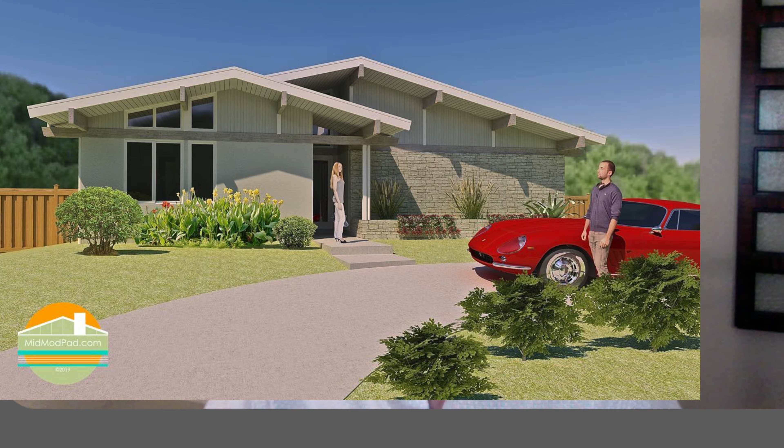To begin, let's take a look at a 1,600 square foot, 3-bedroom, 2.5 bath house that has wall closets off of the bedroom, and there is a walk-in closet off of the master, which we'll talk about a little bit more later. But for right now, the first thing I want to focus on is zooming in on these secondary bedrooms. Each bedroom, in this case, has a closet that is a wall closet.

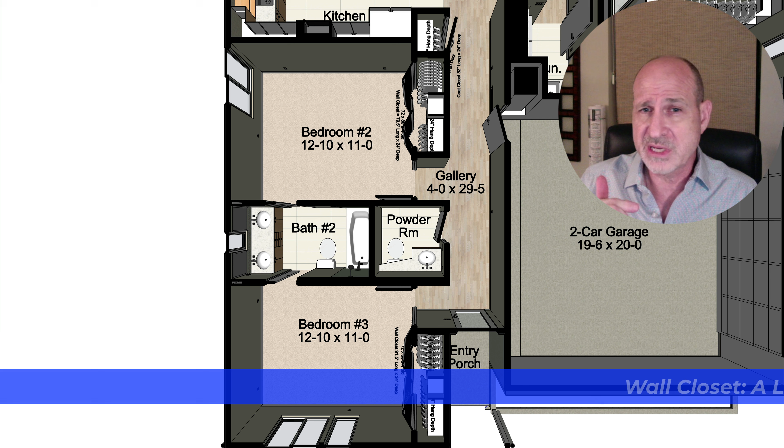Now, a wall closet just means it's a closet that opens up to the room with a wide opening, usually long or long enough to hold at least a child's bedroom clothing, which is a minimum of 5 feet, I would say. And then a lot of times they're anywhere between 6 feet to 8 feet, up to 10 feet long. Not really ever more than 10 feet for a wall closet.

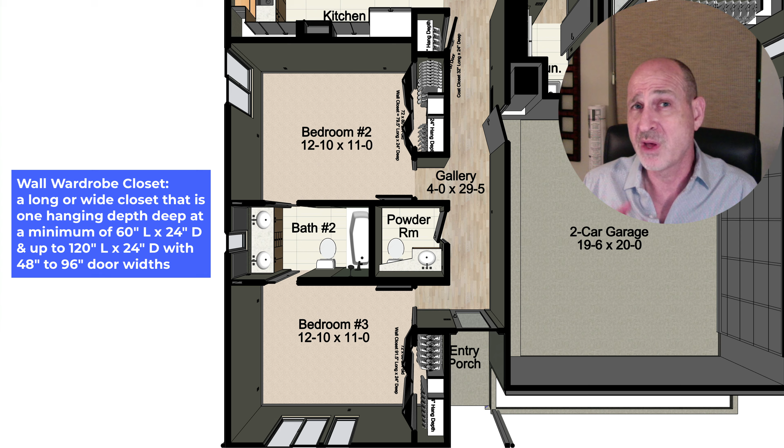But you can see in this case what we have here is on bedroom 2 and bedroom 3, we have a wall closet for each space. So we'll take a look here a little bit closer, and you can see how these are configured. They have a double hanging space in addition to a long hanging space, so you have an option of both in each of these closets.

And in particular on bedroom 3, the closet is a little bit longer. It has a length of 91.5 inches, which is about 7.5 feet, and of course it's 24 inches deep. Now, the 24-inch depth is finish to finish. So if you're doing stud to stud and you have half-inch drywall, then that's 25 inches that you're allowing to frame and then put on the drywall.

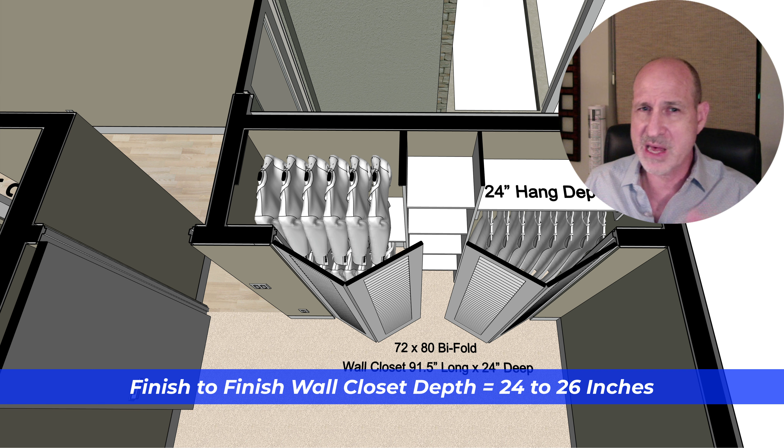Some architects like to give it just a little bit more space, up to 26 inches. That's okay if you have the space to play with, but a lot of times you're limited on your square footage and you want to squeeze everything you can out of maximizing your space in your rooms. So I like to keep them at 24 inches deep for a wall closet.

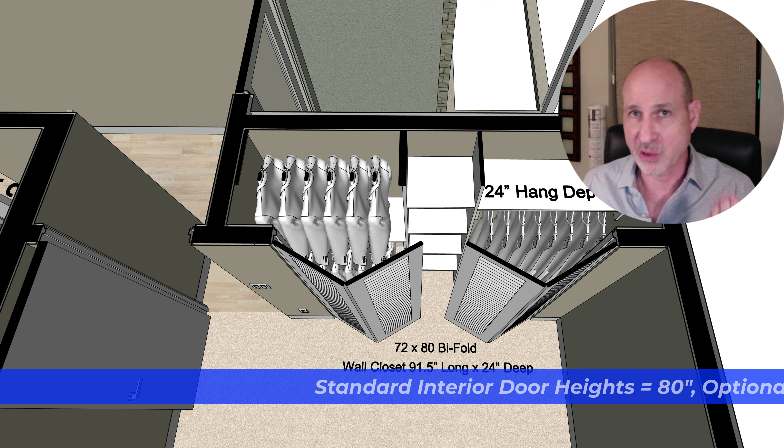Now, you'll notice that we have a bifold door shown here. That bifold door is a total of 72 inches wide by 80 inches tall, which is the standard height for a typical doorway in a U.S. home. That 72 inches has 4 panels of louvered doors. Those can bifold and swing all the way open.

I tend to like to show these more than a sliding closet door, which is an option, or 2 double doors which open out, because when you open the 2 bifolds, you can get a really good view into that closet. And that's really important, I think. If you can see everything very clearly, the natural light from the room goes in, and I just recommend that if you're going to do a wall closet.

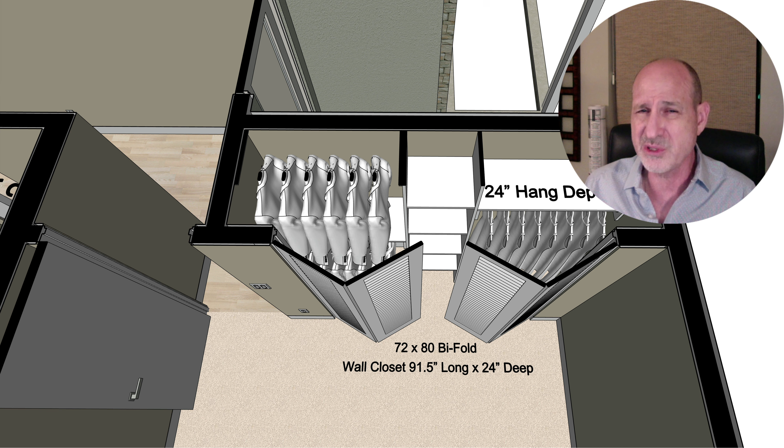Now, a lot of times you do see the sliding doors. They can be mirrored. Some people like that. As for having doors on them, if this were 2 3-foot doors, those 3-foot doors would be pretty big swinging into the room. So you probably wouldn't want to do that in this case. So I'd say either sliding doors or a bifold door here.

The daylight doesn't get to it. You can be putting things in the closet and sort of losing them because they get pushed too far back into a corner that you can't really see, and you don't remember where you put it. You can't see it that well, especially if you pack your closets, and most people do.

So I just want to point that out too. Now I'm going to come back here to this second bedroom, or bedroom number 2, and this closet is slightly shorter. It's pretty much the same arrangement as the other one, but we're less another 10 inches or so here, or 12 inches, I guess.

And we have a similar configuration. It's pretty much the same kind of thing. I'll go back to what I said a moment ago. If it's a child's bedroom and it's a small child, they need up to about 5 feet of wall closet. That's not very much. Now, you always have to keep in mind that children grow up, and as they grow up, they collect more stuff, like we all do. And I think having a closet that's at least 6 feet wide on a wall closet is pretty much kind of standard and a given.

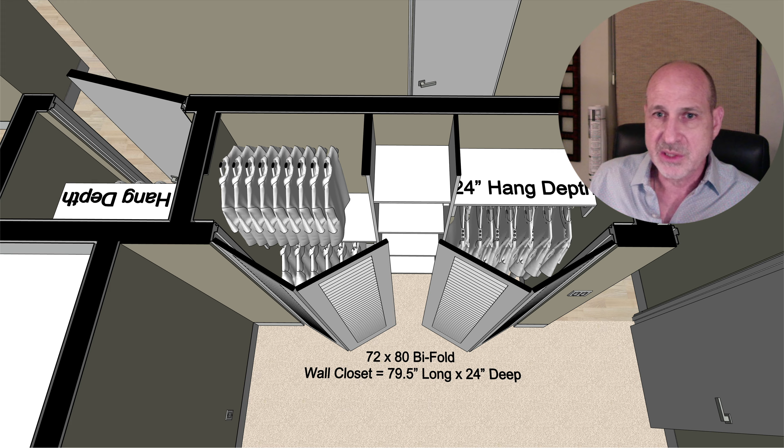8 feet if it's more of a luxury house, up to 10 feet if you really want to be extravagant about it. But when you have a 10-foot wide closet, you're going to have an 8-foot wide closet door, and that door is going to be pretty large. You probably do a sliding panel with two 4-foot pieces, or a sliding panel with three equal pieces as an option.

So the other thing I want to show you here is we have a coat closet in this house off of the main gallery or hallway that we enter into, and that, again, is a hanging depth of 24 inches, which can hold the coats, and you can probably put a vacuum cleaner in this closet as well if you want to use it as some storage, and you have storage on a shelf above the rod.

Also note that I have a 28-inch by 80-inch door here. It could be a 24-inch by 80-inch door, which would be fine, but 28 inches just kind of lets you see into the closet a little bit better.

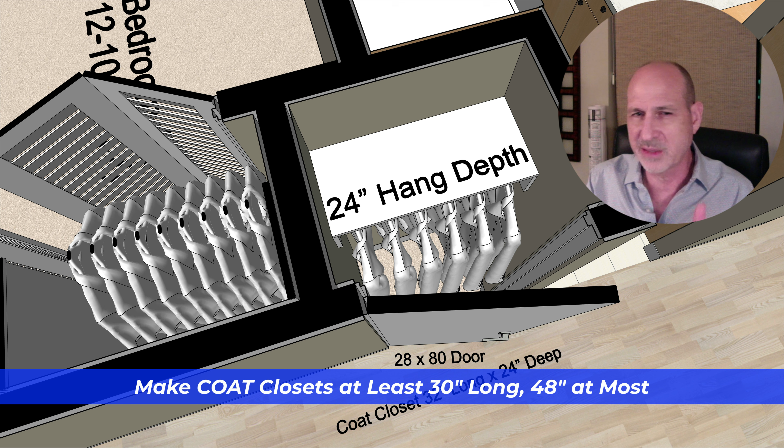Also note that the coat closet is only 32 inches long. It's the 24-inch standard depth that I'm recommending. But the 32-inch length is pretty short for a closet, but in this case it can work just fine with this smaller house, and that's kind of what I had left over to work with as I was doing this.

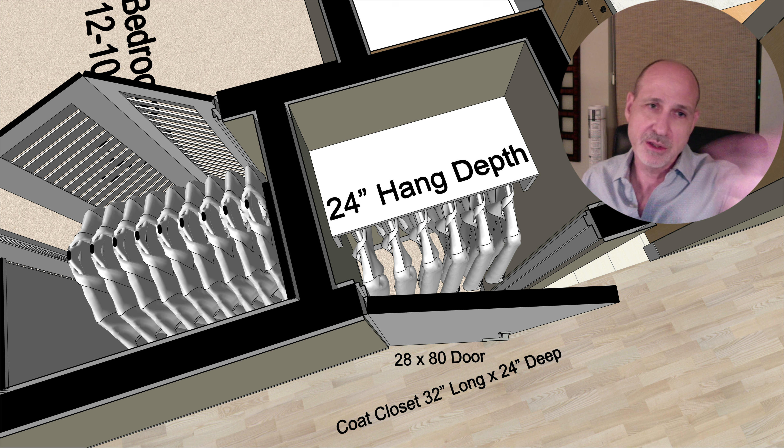Now, I could have always made the closet next to it a little bit shorter if I wanted to have 36 inches inside this coat closet. You can adjust, especially when you line things up like this and lay them out, to just the right kind of size and space that you want to work with, or give it a little, take a little, depending on what your goals are for the space.

Also, I want to just point out, this is not a coat closet or a wardrobe closet, but I thought I would just point this out real quick. We have a linen closet. Now, I've made this linen closet 24 inches deep, but it's 48 inches long. So it's a good sized linen closet.

What you would do is you would put an 18-inch deep shelving unit inside that closet to use for your linens. And here, I just want to point out that I've used a double door, 36 inches wide and 80 inches tall, to access this closet. What this does for you is those small doors are easy to open and they don't really get in the way like a larger door could. So that's why I sort of tend to do that.

Now, double doors are going to cost more than a standard door or a regular door, or just a single door, of course. But it's something that you could consider if you're trying to make it look a little bit nicer and dress it up a bit.

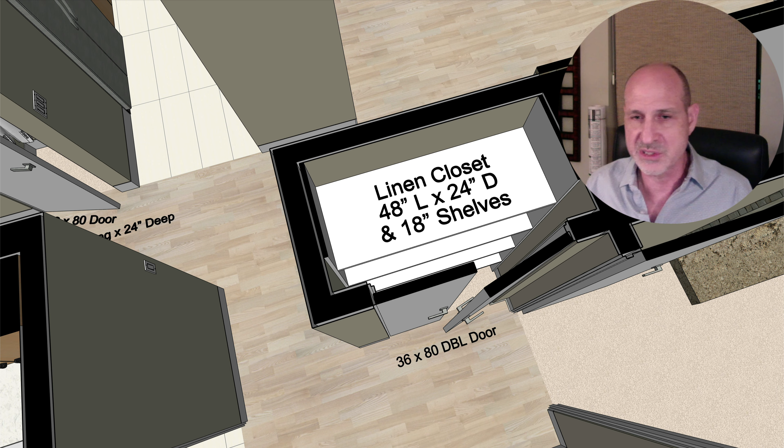You will spend more, but I think that in the long run, somebody would appreciate not having to run into a 3-foot door that would swing out into this hallway that's in front of the bedroom, for example. So that takes care of the wall closet for the smaller wall closet in this case.

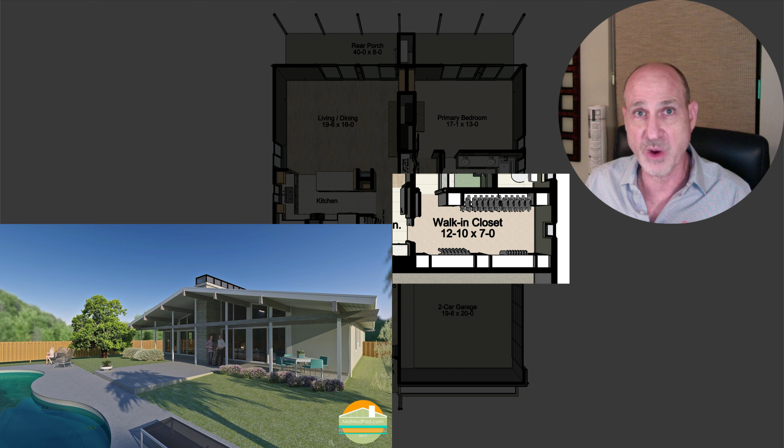And now we're going to take a look at walk-in closets. You can see this house has a walk-in closet off of the primary suite, which is 12 feet 10 inches long and 7 feet wide. Keep in mind that 7 feet - that's a really important dimension as we keep going with this. But what I'm going to do next is go to a larger house and talk more about walk-in closets.

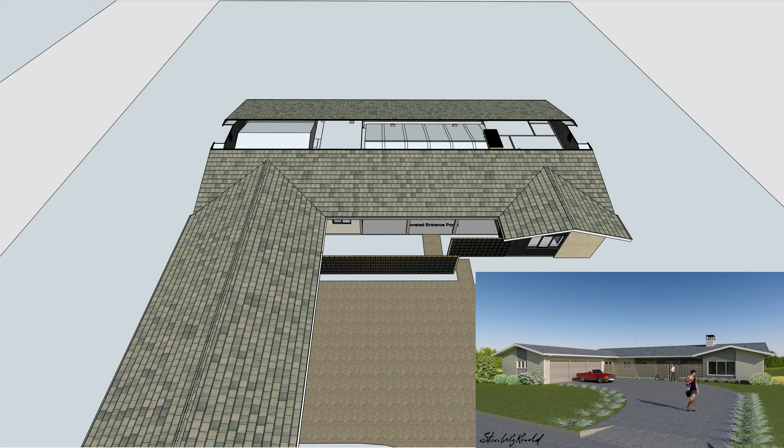As promised, here we have a much larger, about 2,800 square foot house that we're going to look at. I want to point out that in this particular plan, all of the bedrooms have walk-in closets of one type or another. I'm going to explain the different configurations that we have here, and the one thing that trips everybody up out there - it seems to be a common thing. So we'll talk about that here in just a minute.

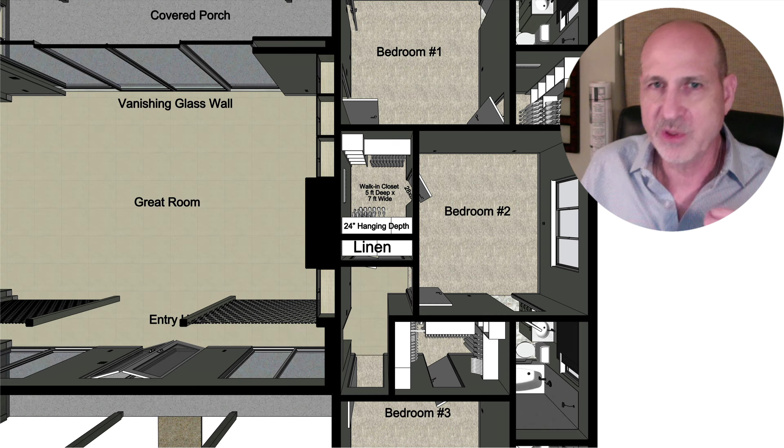First, let's zoom into the bedroom wing of this house. We have 3 bedrooms on this side, each one an ensuite. We will go to bedroom 2 first and take a look at this walk-in closet.

Now, this walk-in closet is 5 feet deep and 7 feet wide. The 7-foot width is what's really critical here, and I'll explain more of that in a minute. But if you have a walk-in closet, get that 7 feet in width to really make it work well, and then make it 5 feet deep as an average.

You could go 4 feet - I wouldn't go less than that. But even if you do 4 feet, keep in mind that on both sides of you in a closet like this, in total you'll have 8 linear feet of hanging space, which is a lot, especially for a smaller bedroom. So at 5 feet, we've got 10 feet of linear hanging space combined on both sides.

But the most important thing here to remember is that we're talking about being able to go into this closet and move around and dress and undress. What we have here is a 28-inch wide by 80-inch tall door to go into this closet.

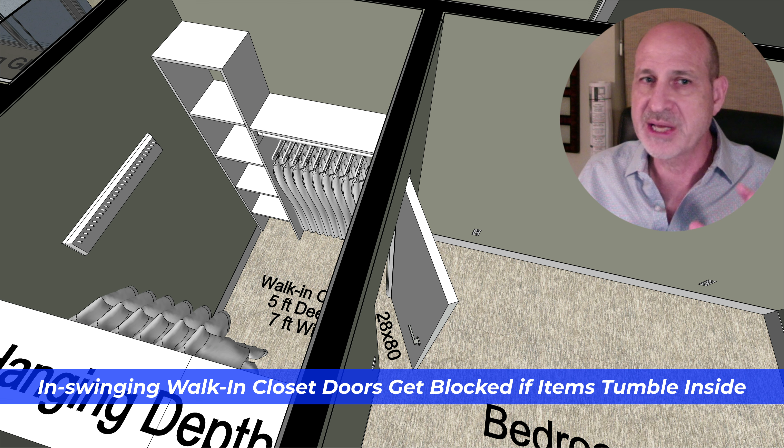I recommend also that you have your doors for walk-ins swing outward. Sometimes people make them swing inward. The problem with going inward is that closets can get pretty packed, and should something fall over or shift or come down in the closet accidentally, and you go to try to push open the door into the closet and there's stuff blocking the door, you've got quite a problem. So that's why I recommend making your doors open outward for a walk-in closet.

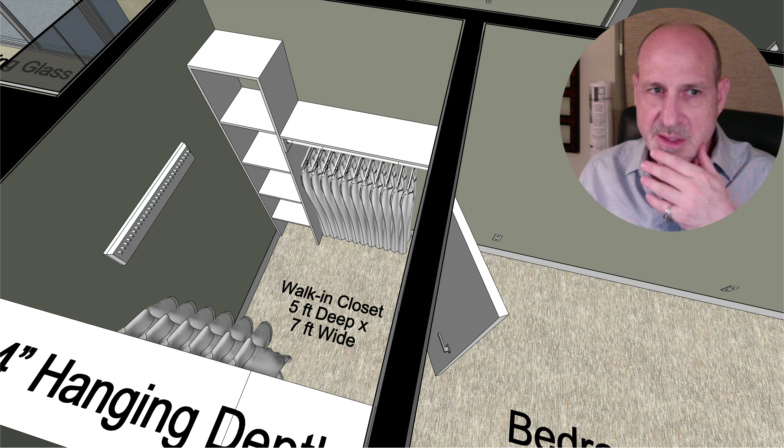The other thing I want you to notice is that on the back wall, as you walk in, I've left that space for something that could be a tie rack, a belt rack, or you could do all sorts of different kinds of configurations back there. But you want something shallow on that back wall, and the reason is we want to be able to see the hanging space once we walk into that closet. We don't want something protruding out that makes a dark corner where something gets stuffed back into the corner and you can't really see it very well.

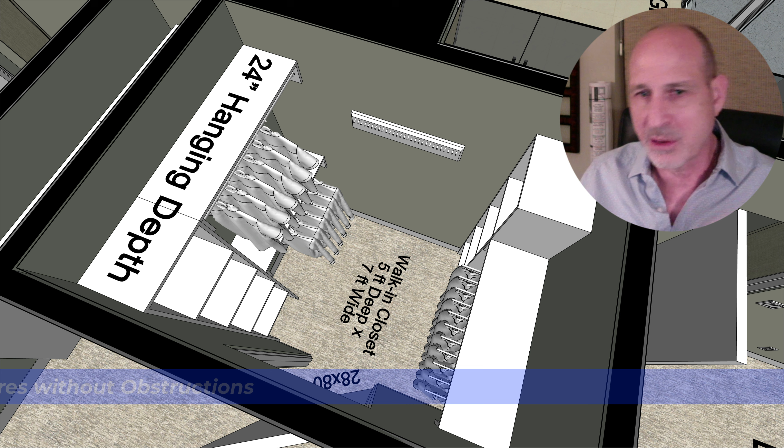You'll notice that I have a long hanging space on the right-hand side and a double hanging space on this left-hand side. And of course, we're talking about making this a 24-inch deep hanging space, which is the standard hanging space that you usually have.

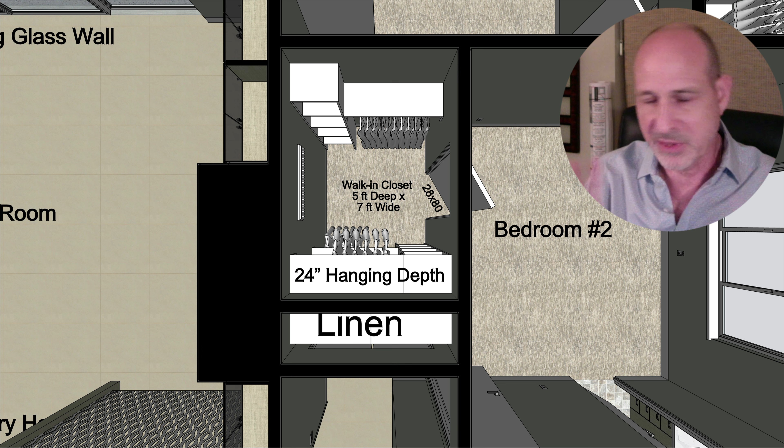What that does in a 7-foot wide closet, if you have hanging space on both sides, you end up with a 3-foot path down the center of that closet to move around, put on your shirt, put on your sweater without bumping into things. You have enough room to do that if you have that 3-foot path down the center of that space. Very convenient, very nice, very sort of luxurious, if you want to put it that way, for a house. It usually needs a larger footprint to be able to host closets of that size.

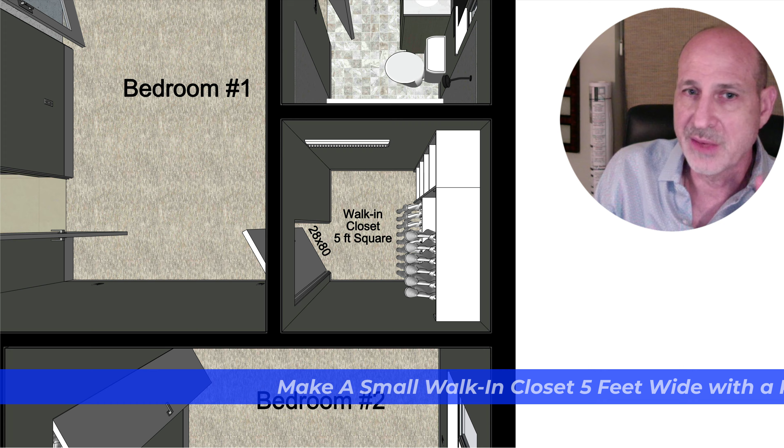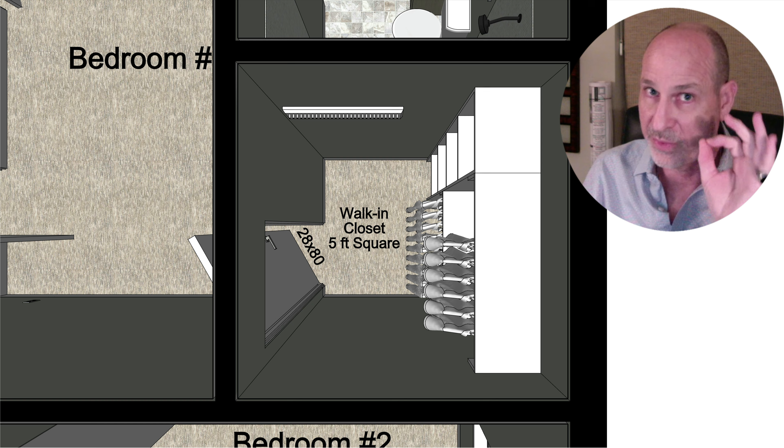The other option here on bedroom 1 is this other closet. What I've done is created a walk-in, but made it 5 feet square, that's 60 inches by 60 inches. It's a walk-in closet, but what you'd want to do is put your hanging space on one of the walls, not both. We'll talk about the problem of having space on both walls in a minute.

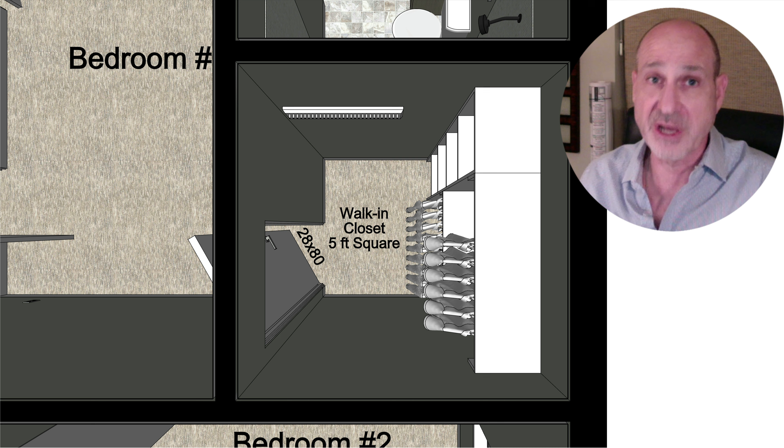In this case, I have a double rod on the back wall as you enter. That way, when you open your door and walk in, everything's right in front of you. If you put it on the side, things are not in front of you, you have to turn and look. I find it easier to walk in and have it right in front of you. On your left, you have the tie rack, belt rack, and accessory pegs you can use for lots of different things. That's just an idea, there's lots of things you could do there, like a shoe tree hanging off the wall.

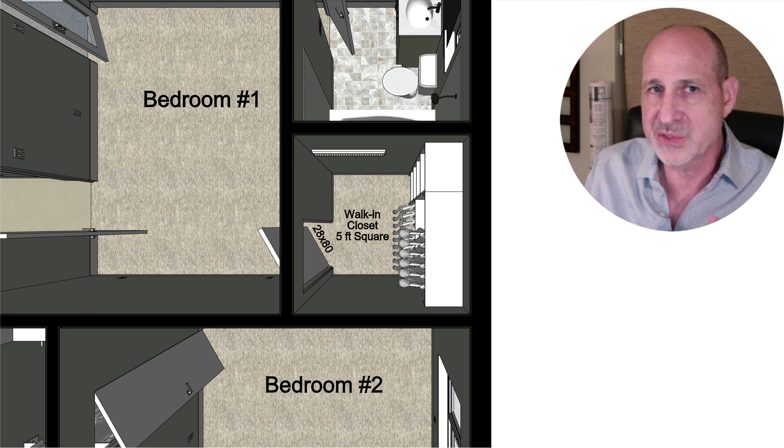You'll notice I have a 28-inch by 80-inch door going into that closet. It could be a 24-inch by 80-inch door, but 24 inches is pretty narrow these days for most people. People are taller and a little bigger than they used to be, so the 28 inches makes it a little more comfortable.

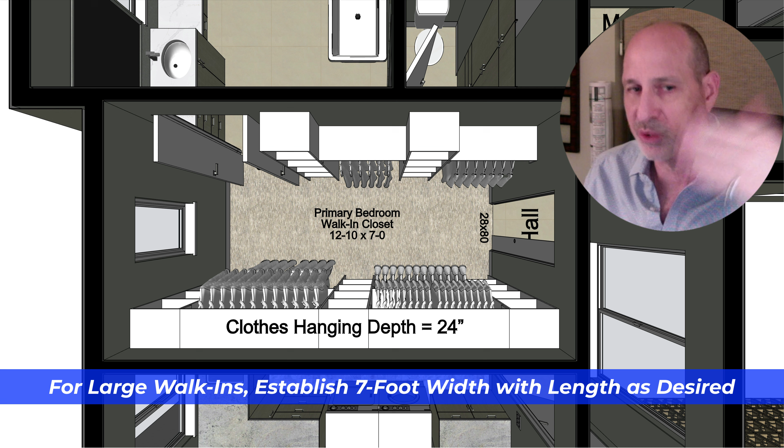Now I want to go back out here and go over to the master, or primary suite, in this good-sized rambling ranch house. Here we have, similar to the floor plan I showed you previously, a 12'10" length and a 7-foot width on this big walk-in closet. And again, we have our 24-inch deep hanging space on two sides opposite each other.

Keep that aisle down the center clear so we can move around and dress and undress. In this case, I've also indicated a doorway, a pocket door, that gives access to a hallway that goes to a laundry room. I'm seeing this more, where people like to have the master bedroom closet be really close to, or right next to, or open into a laundry room, because your clothes are going to be in this spot and you'll want the shortest path to the laundry room with your dirty clothes.

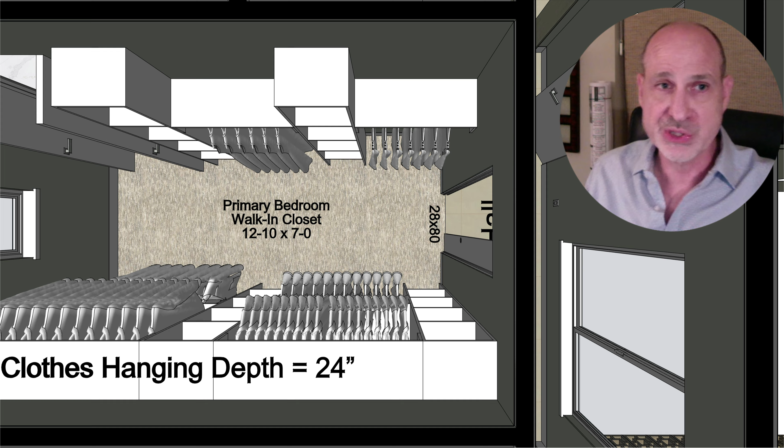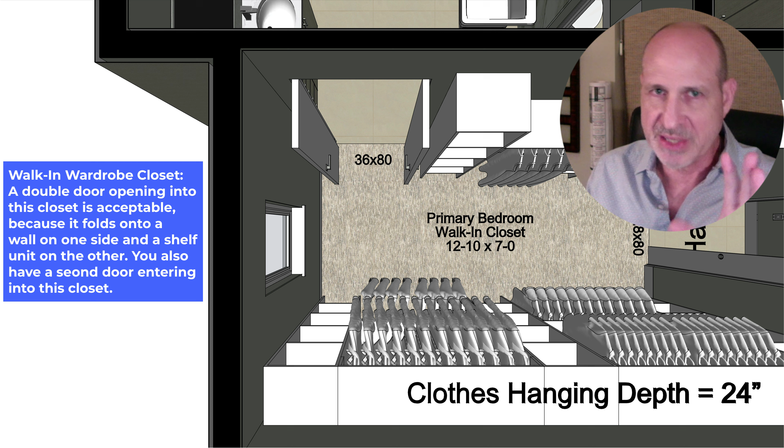Makes sense. Also, off of the primary bathroom, you enter this big walk-in closet through another small double door, similar to what I showed in that other house, 36 inches wide by 80 inches tall. It's a smallish door that folds kind of out of the way, so if you leave it open, the door is not in the way, it just sits there nicely. It also looks kind of nice to have a double door over a single panel door sometimes. I know I mentioned it's more expensive to do that, but it's just kind of an architectural check mark you could use if you wanted.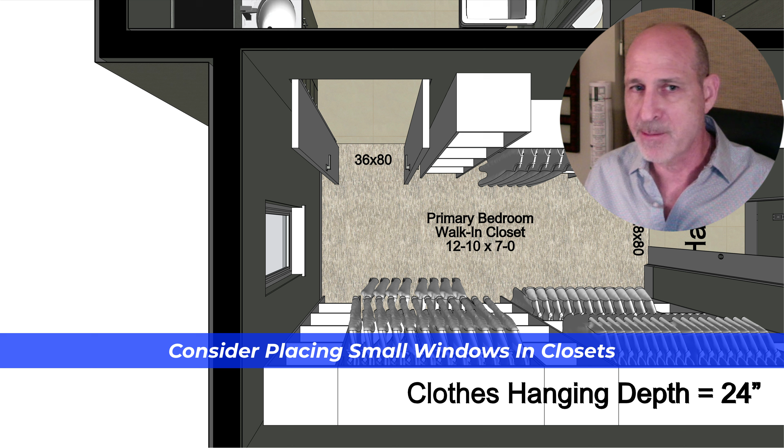You'll also notice I have a window in this closet. This could be a little controversial, but I tend to think it's a good idea, because how many times do you go into your closet, walk-in or otherwise, and you can't see a thing? You can't see the color rendition. If you have a window letting in natural daylight, you'll want to keep some sort of window covering over it to keep direct sunlight out, because you don't want direct sunlight fading clothes. But a single window with a simple blind can take care of that, and it helps during the day when you go into that closet.

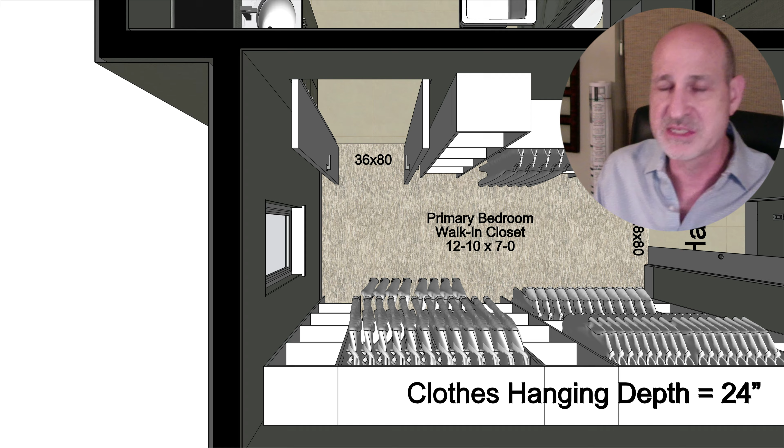Yes, you can turn on the light, but having some natural daylight just makes that space so much easier to work in, because you can see things better. You have that extra natural light, and you see the true color rendition of your clothing - you don't confuse the navy blue with the black blazer. I think that's actually a cool idea. I've done that several times for clients.

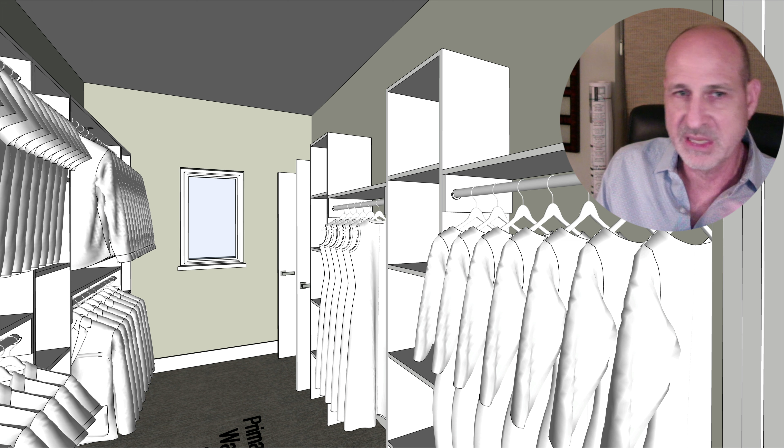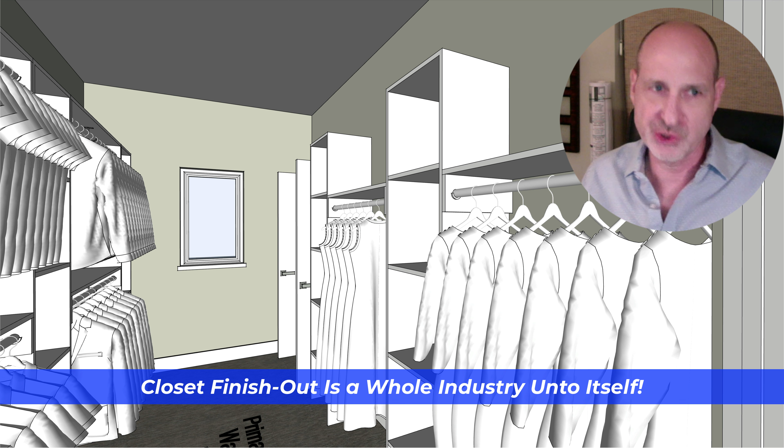I want to go down and take a look at this big closet, just to get a sense of what your space is like in a closet like this. I think it's pretty cool to have a design laid out this way, on the luxury side for sure - more expensive, more detail, but in some of these larger homes, you'd want something like this.

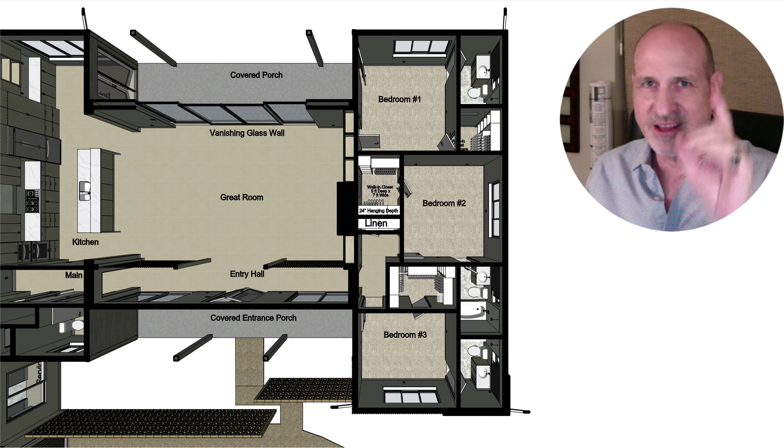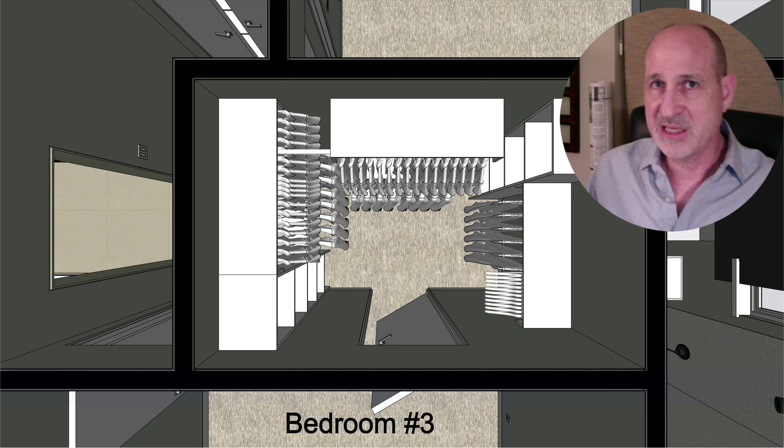I think we're going to come back out here - I think we covered that pretty well. Let's go over to bedroom number 3, and here's the catch - let's go in and take a look at this closet. Now, I don't have this labeled, but this closet is about 8 feet wide and about 5 feet deep. So we have that 7-foot width plus a little bit more to make hanging space on either side. But what's happened here is we've put in a rod perpendicular to the rod on the left-hand side.

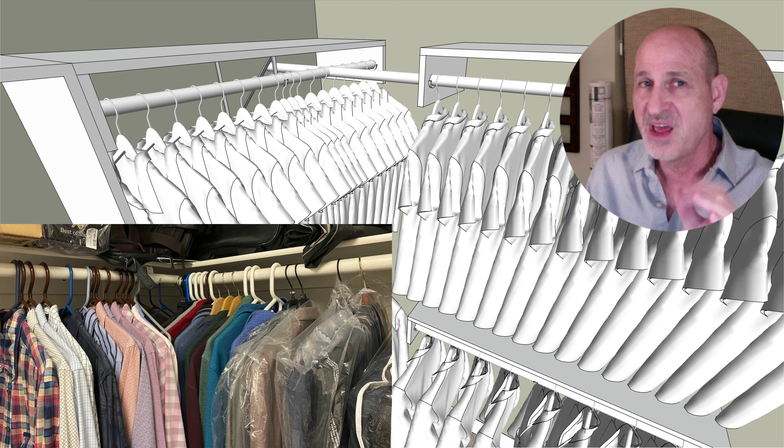What happens when you do that? This is what I see all over the place, all the time, and it's not a good idea. Here's why: whatever is in that crossing rod - you can see way back there, those shirts you want to grab - because the rod crosses, you can't pull them all the way down the rod because the other rod's in the way. I see this a lot, you'd be surprised. And then also, the clothing on the right-hand side is sort of blocking the view of the clothing back in that corner. It's awkward. It's just awkward.

I think what I want to emphasize here most is that if you have a walk-in closet, make it 7 feet wide at least, and then have a 3-foot aisle down the center. Put the hanging space on the two opposite sides in that 7-foot width. Don't try to put clothes into the corner, or design it so that, say for example, you have a 9-foot by 9-foot closet and you line three walls of the closet with hanging space, because those two corners are going to be very awkward to get to and see.

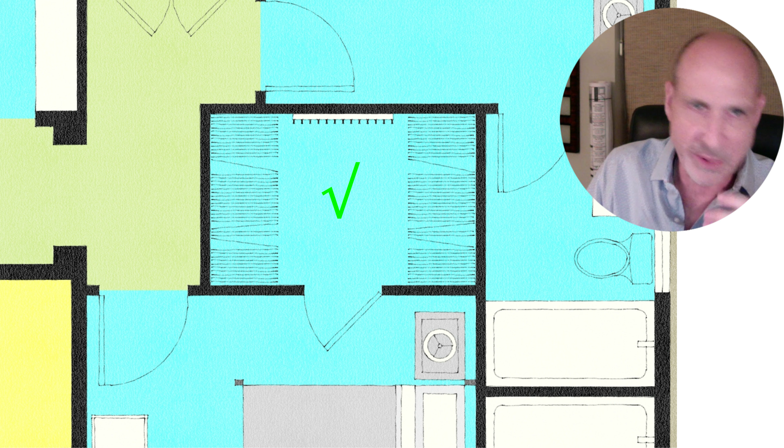So this is just what I recommend - I find this is a much better way to do this. I've actually had clients I've talked to about this, and they say, yeah, I never really thought about that before. So there you go.

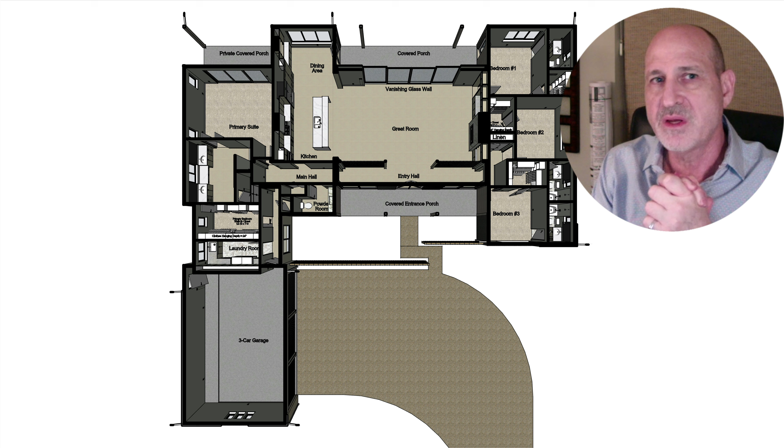All right, then, hopefully that was helpful to you. That's all about wardrobe closets. You can see that when you have space, or when you're planning and laying out these floor plans, and you know you have these very specific dimensions to work with, you can make the plans work out much more easily. You don't want to make the closet an extra 3 feet wide just because you have space left over - that space should probably be in a room where it can actually be used. So that really takes care of the two types of closets you can have in your average suburban house.

Now, I do want to mention something I like to call the glamour closet. You'll see this on those reality shows where people go into private homes in gigantic houses, and they walk in and there's a closet that looks like something in a high-end clothing store on Fifth Avenue in New York - there's a bench in the center, a big table in the center, and all the jewelry's laid out on it. That's the glamour closet - that's a totally different thing, so that's not what we're talking about here. I'm just talking about the average house, the average wall closet, the average walk-in closet.